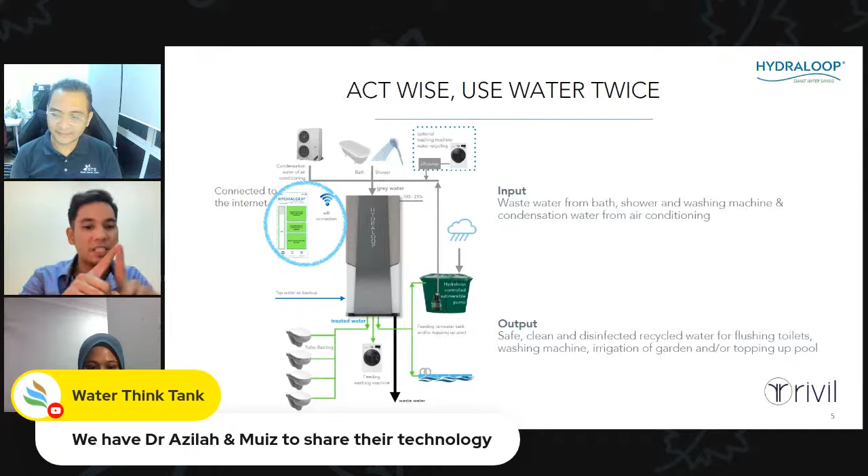So it can be used for non-potable activities, such as, you can see the first main thing is toilet flushing. Do we need potable quality water to flush our waste, our business? And then number two, for example, garden irrigation, I think it is more than enough if you use a lower quality of water.

And then it can be also used to wash your clothes by giving the feed to a washing machine. And then it can also be used to top up or to fill in the swimming pool. So that is basically the focus of grey water recycling. In other words, or in summary, take the grey water, recycle, and then use for non-potable activities. Okay. So I'm going to stop you right there.

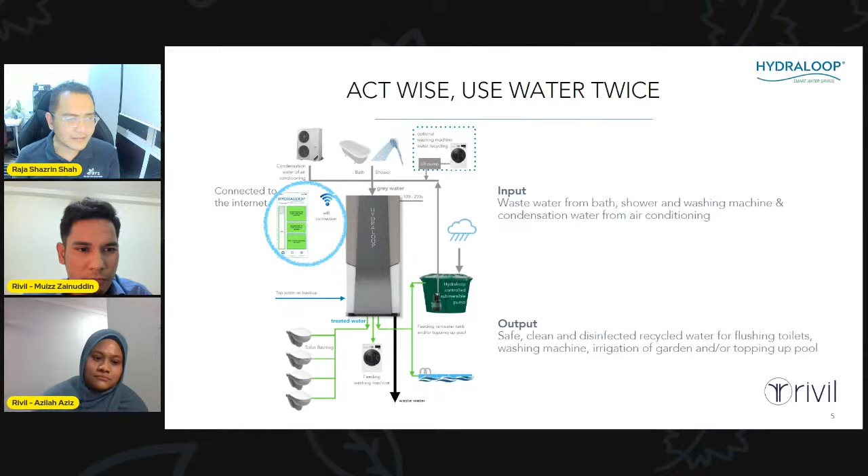So, well, I can see a lot of people might be interested, especially people who may not have a lot of access to water, or people who are looking to reduce their environmental footprint. So you were about to tell me about the technology. I think it's in the next media slide that you want to explain, right? So walk us through a little bit on how the system works.

Okay. Dr. Azilah, I think maybe you can take this. Right. So as you can see, Hydraloop is a device that is, I can say, an all-in-one system where it treats the grey water in your household, or it can be cascaded to treat more volume of water in a small building. So as you can see from the diagram, it has six treatment processes ongoing in the device,

in the machine actually. So the first step is when the input water, which is the grey water from your house, will enter on top of the machine. And then the first step is sedimentation. So the sediment is collected at the bottom of the tank, and then it will be removed to the sewage. And the second step is flotation. So during flotation, the floating dirt such as the hair and the soap will be skimmed on top of the machine part.

And then the third step is dissolved air flotation. So in this step, we introduce tiny air bubbles into the treatment tank, and then these small bubbles will collect all the other sediment particles and travel upwards, and it will be skimmed off to the sewer. And then number four is foam fractionation. That's why we take the input from the shower and the washing machine, where it has the soap and the detergents, right? So the soap and suspended solids will be combined and float to the top, and it will be skimmed off

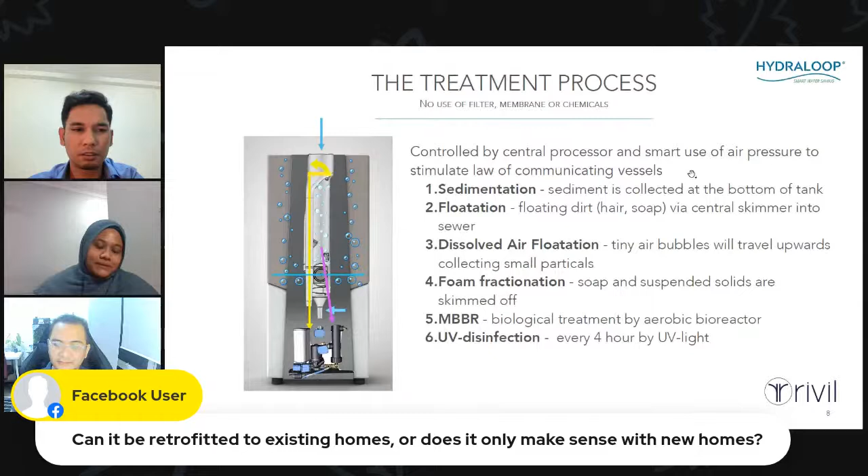This is from a Facebook user comment. I think this is from Ilyas Saidin. Sorry, this is from Siva. They're asking whether it can be retrofitted into an existing home or does it make sense only with new homes. So I guess what you were talking about, the requirements of water coming from the black and the grey. So if we were to consider such technologies in existing homes, does it mean that we will have to redo our plumbing system to route different kinds of water to the system and others to the drain or to the sewers?

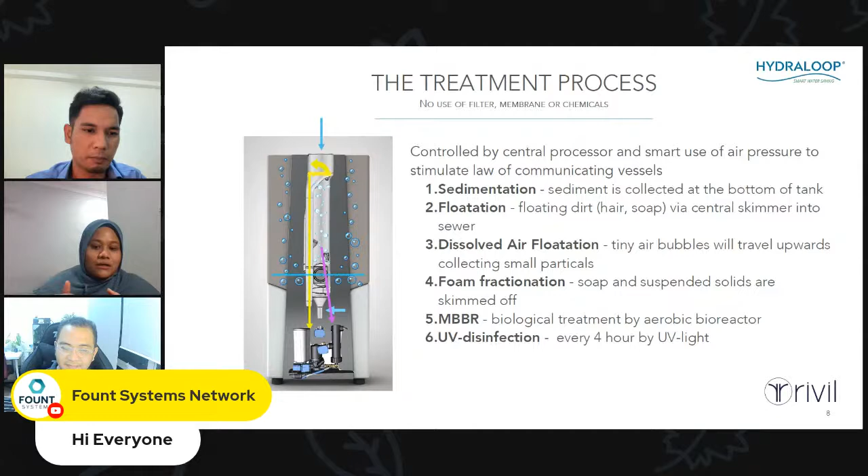Yes, correct. So technically, in the existing building, there will be a lot of work to be done because you have to restructure the whole plumbing system in your existing house, right? Unless you are in the step of remodeling the piping sanitation system in the house, then it will be. But my opinion is that it's best to introduce the Hydraloop in the design phase of developing the house. So it doesn't mean that it cannot be done, it can be done, but with extra work because of the hacking and so on, and extra cost. I see. What about in terms of space? How much space does it actually take?

I think we don't have the picture here, but we can give the analogy of one big refrigerator, only that space. The single door refrigerator, not the double door. All right, so it just takes up space as a single door refrigerator would take.

What about in terms of other requirements? What kind of energy consumption are we talking about? And does it produce sound, smell, anything along the line? In terms of energy consumption, it is quite low. This is based on the European consumption, so it's about 175 kilowatt hours per year. So it doesn't really need a lot of energy.

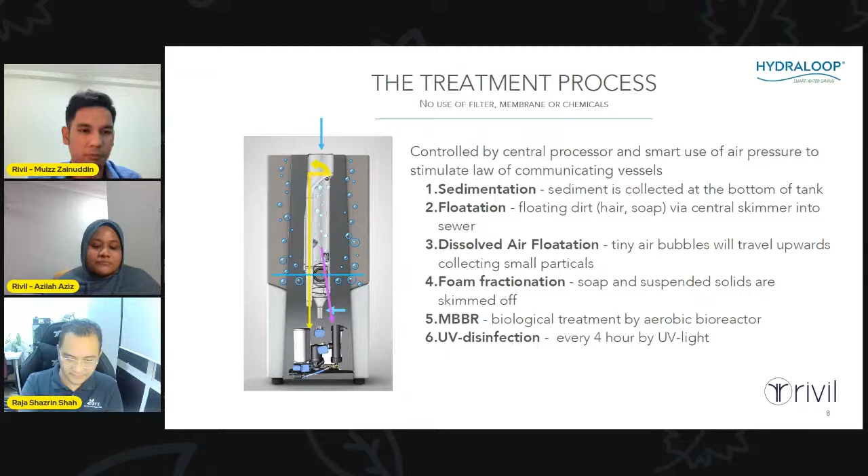And so far, in European countries, they have been putting it next to their washing machine or in their kitchen area. They do not have any smells outside, because with MBBR, which is like an aerobic bioreactor, they might have some kind of sulfur or nitrogen smell, but no. So far the user experience was good.

Okay, so you just put it there and it's quiet. It hardly bothers you. Can we say that? Hardly bothers. And even the design is actually quite pretty. It's like just another decoration that you have in the house.

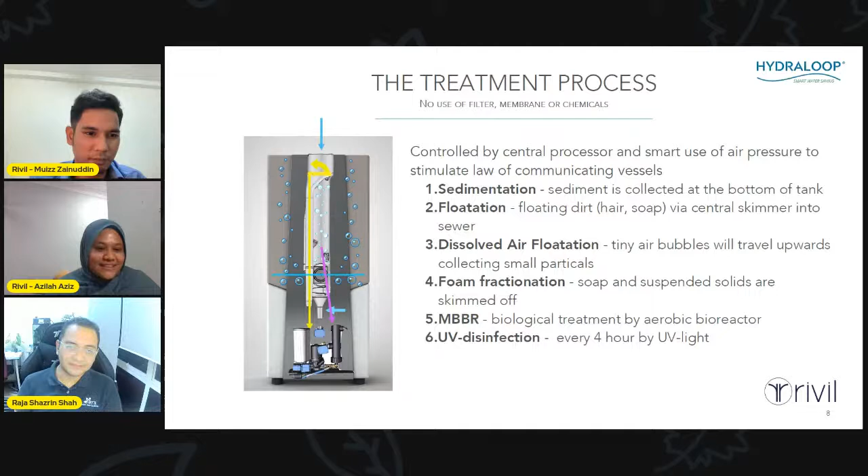But mind you, this water is not suitable for drinking. It is to be used as non-potable water, for toilet flushing, garden irrigation, or to top up your swimming pool. Okay, so it's relatively clear, but it's not classified as potable water.

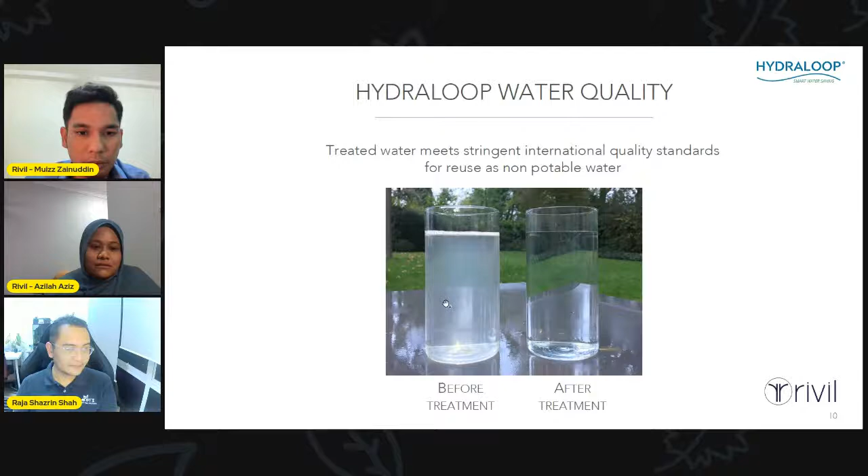And then I think it captured my interest because Encik Ilyas mentioned rainwater harvesting, right? Yes. Because there is a case where a Hydraloop client in Belgium paired it with rainwater harvesting, and the reduction of the consumption is 90%. 90% of the usage of tap water. But of course, the consumption can remain. It can maintain the lifestyle of water, but you are using less water. So that is one of the cases where they couple rainwater harvesting and grey water recycling.

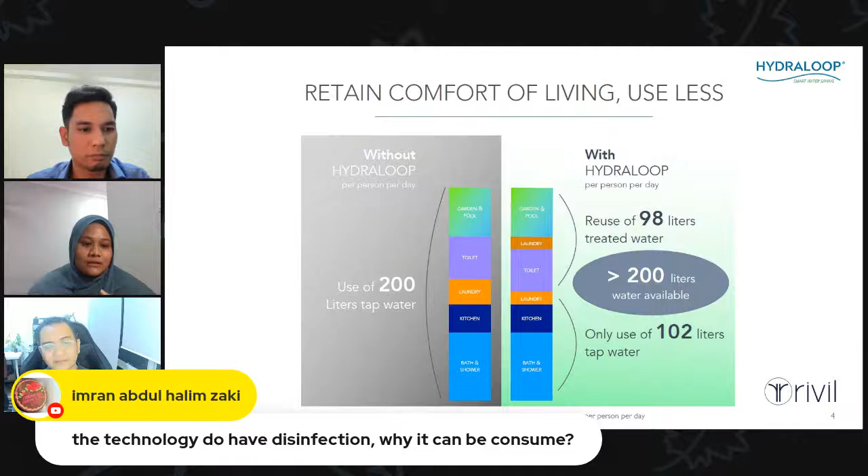But in the case of Hydraloop, the water source itself is from the grey water. So the parameters that we are looking at for the effluent, the output water, are only very basic. It's just for discharge back to nature. So in terms of changing it back to potable water, a lot of filtration is still needed. That's why even though we have the UV disinfection, the purpose is not for drinking. It's just to make sure that the water that goes back to nature is cleaner, less soapy, and lacking bacteria.

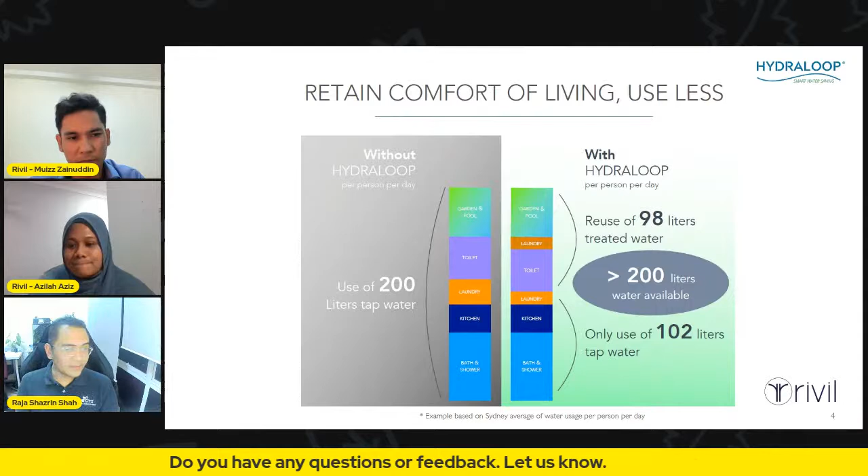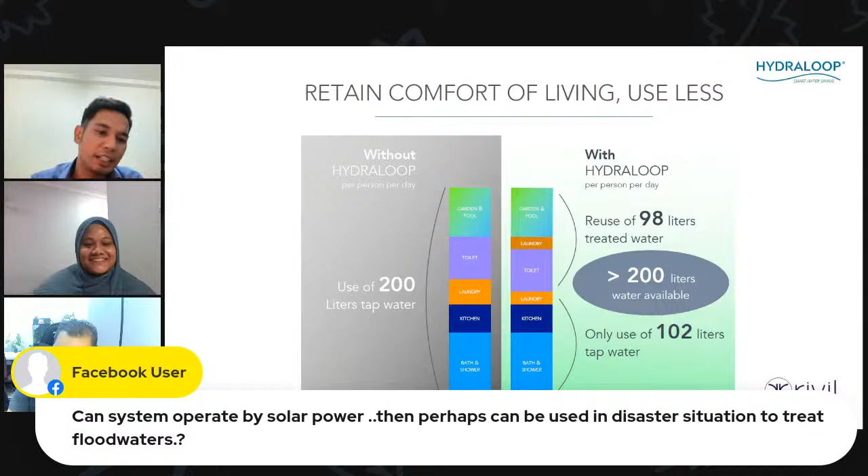All right. So maybe we can have another question from the user. Can the system be operated by solar power? And perhaps this can be extended for use in disaster situations to treat flood waters. How do you comment on that? Wow, to treat flood waters. Interesting question. If I have to comment here, of course it can be operated using solar power. From the solar power you can convert it into a power supply. You can basically power up any device. So that answers the first question, and then disaster situations to treat flood waters.

I think flood waters contain very much other things, like contamination, right? Contamination there, and it may have dirt and silt from the mud, right? So there will be a need for pre-sedimentation or something else to have it be safe for the Hydraloop system. It's not intended for that use, I can say.

There's another question. What is the future potential, both in terms of cost and potential water savings? So we're talking about the water savings here. It shows that you're going to be able to save almost half of the water that you're actually using due to recycling. And how much is that in terms of cost? I mean, how much water can we save? I think for how much water can be saved, we touched on it a bit earlier. It can reduce the consumption about 45 to 50%.

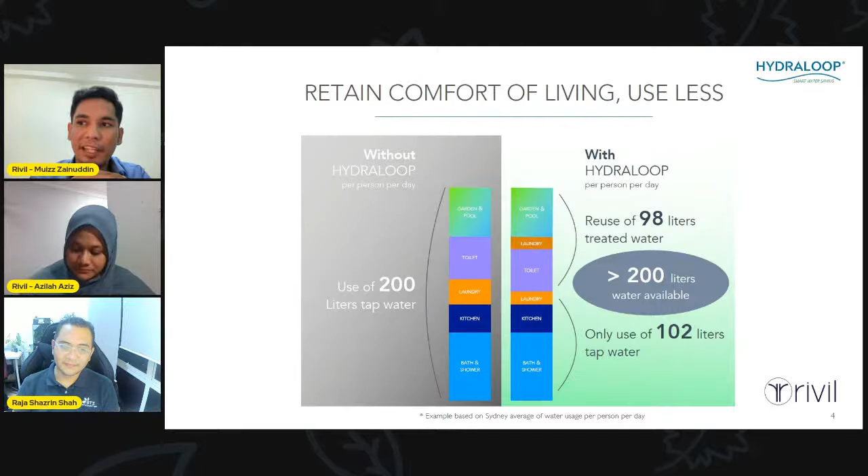But on the cost saving, as we all may be aware, the water tariff in Malaysia can be considered very low. So if you are looking from the cost perspective, for us we have some difficulties because, like I mentioned just now, the water tariff is quite low. So based on our experience, the interest is coming more from the sustainability perspective, and from places where they lack access to fresh water.

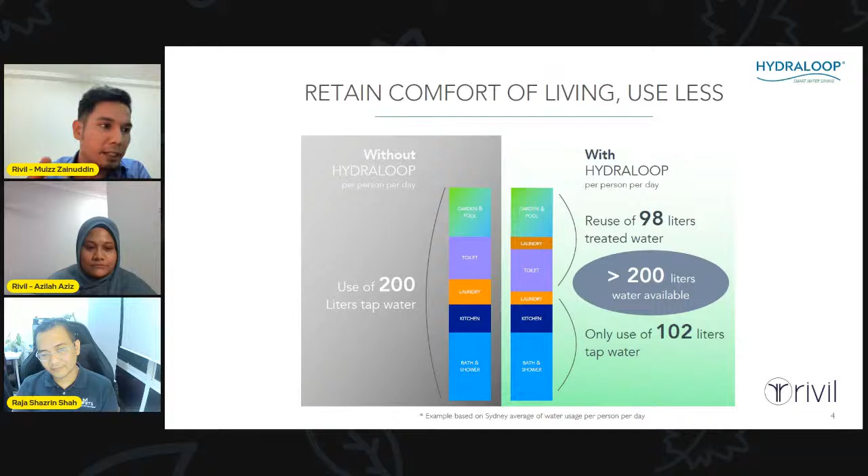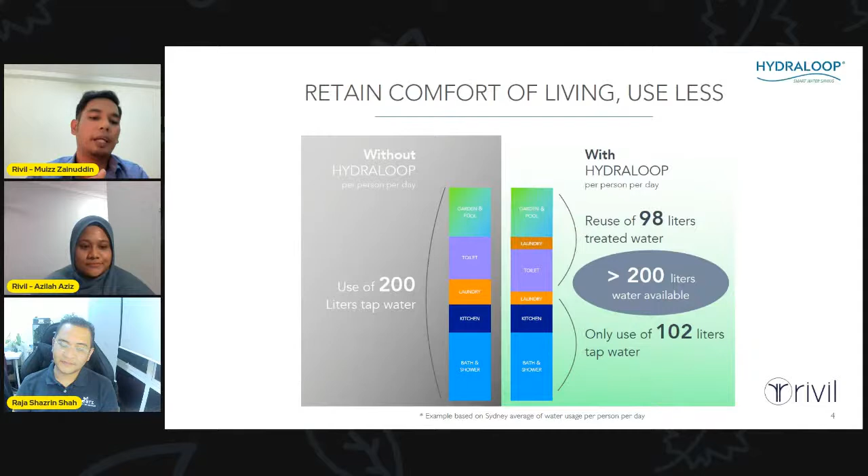For example, remote areas. Sometimes people want to build their home off grid, and some of the interest comes from projects developed with a green approach, and basically they came to us. So that is some clarification on that.

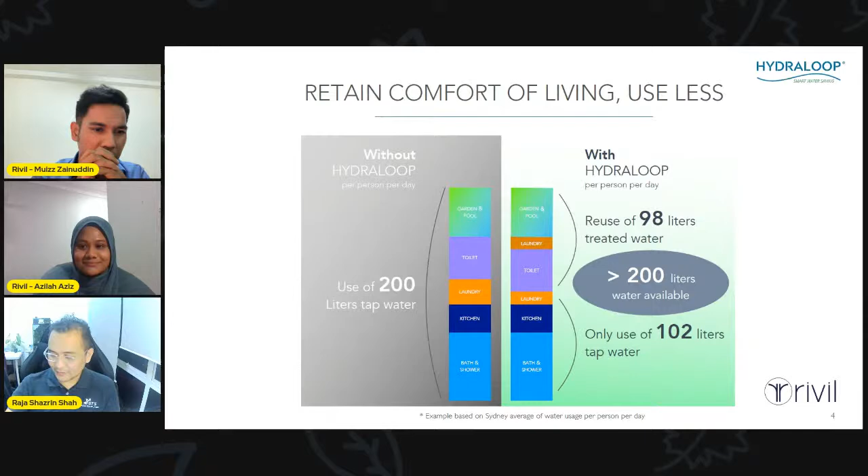Okay, why don't we get rid of the slides? Then we can have a more comfortable chat. All right. So I noticed that your tagline is about using grey water, recycling water to use it twice. So I'm going to ask you, why is it 2 times? It cannot be recycled more?

Well, I guess technically it is recycled back actually. So basically you use back the water that you've used. Well, so the first... sorry, Muizz, go.

That means, yeah, you are using it twice, but actually there was a saying, some joke during our meeting with Hydraloop before, maybe some molecule of water is just going in there infinitely, not sure, but maybe there is some possibility there. But answering your question, it's actually more, but to keep it catchy, using the water thrice or four times is maybe not as catchy as twice.

Okay, so it's actually just a tagline there, used twice, but the system will not be able to recognize which water has been used once or twice. It will just be in the loop, as the name might suggest. It's a Hydraloop. Yes.

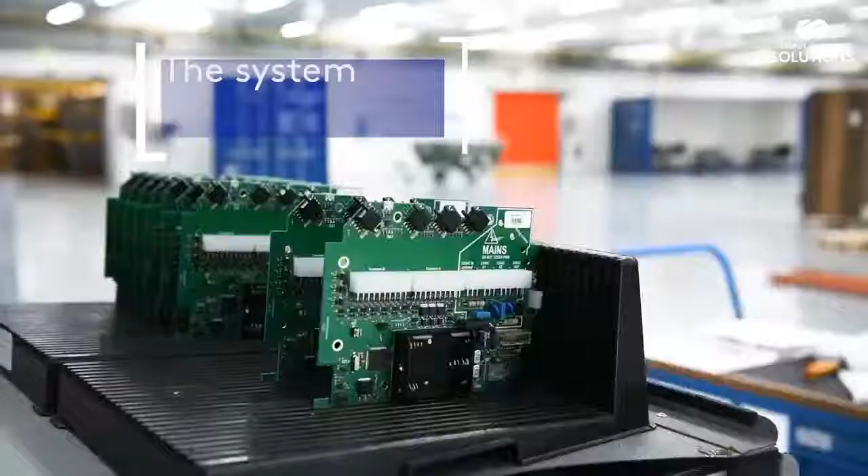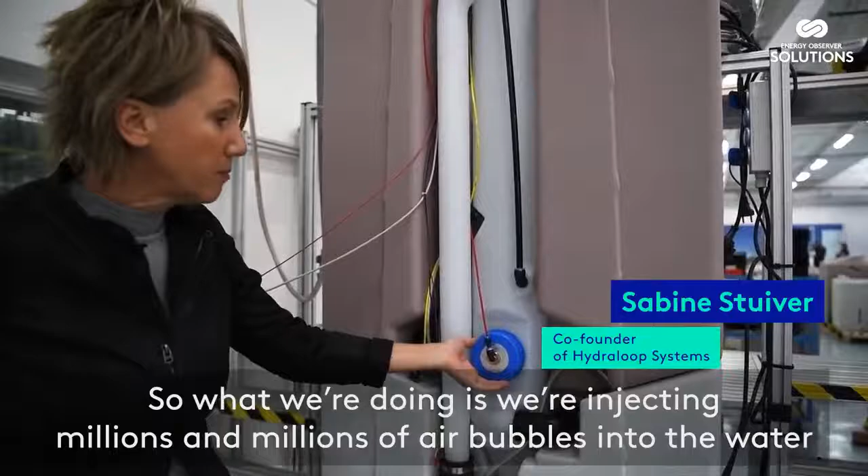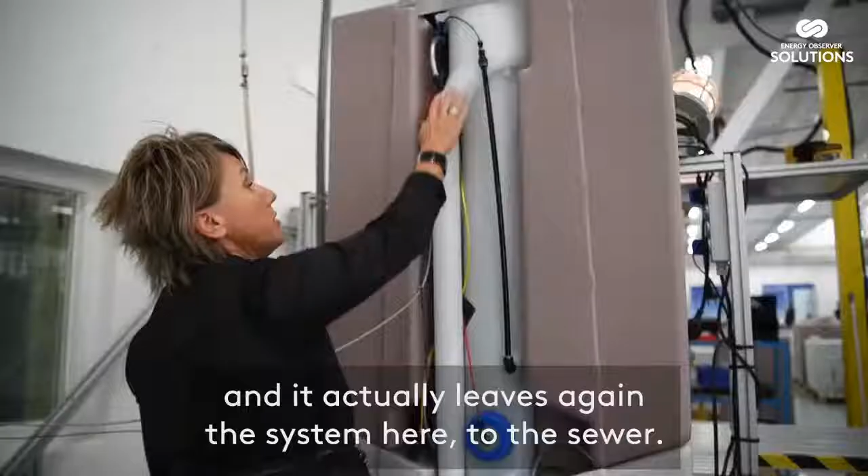So what we're doing is we're injecting millions and millions of air bubbles into the water. And the interesting thing is that the dirt in the water, the suspended solids they're called, actually stick to the outer skin of a bubble. That's what they like to do. The bubble travels up, and because of the soap, we create foam. And the foam is skimmed off, and it leaves the system here to the sewer.

Our goal is that no house will be built anywhere on Earth without its own water recycling system. To motivate other companies so that together we can supply water recycling products to people and to organizations so that they have the power to just recycle water themselves and contribute to a more sustainable world.

Okay, that answers a lot of the questions, I think. So it's basically what drives the individual. If you appreciate how water usage and its withdrawal from the sources affects the environment, and how you can contribute by just using less or reusing your water, that is another driver which is probably the key to having these kinds of technologies come into the country. I don't know if you want to address the question, but there's a bottom line question.